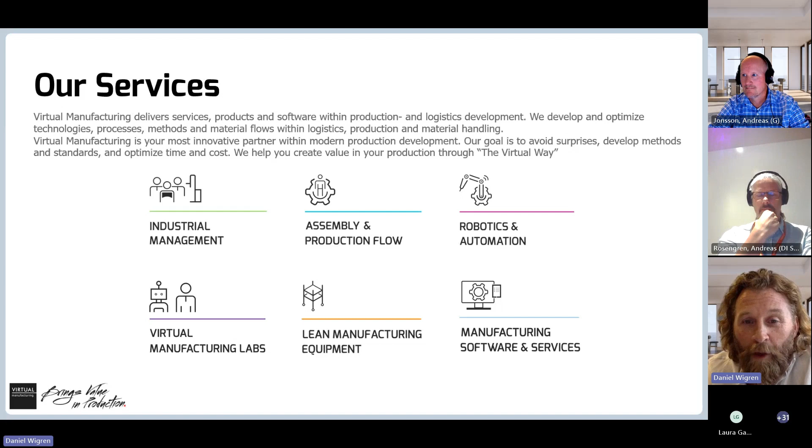I guess most of you joining us for the call today are within the manufacturing industry, and I just want to raise a challenge to all of us. This is sort of a slogan that we picked up somewhere down the years, and I thought it's pretty good, because at the end of the day, everyone involved in the manufacturing industry has a common challenge: trying to find out exactly what needs to be manufactured.

Ask us the question why we need to manufacture it, how we should manufacture it, and when it should be manufactured, in order to optimize performance and flow with minimal costs and resources. At the end of the day, that's what most of us are probably working with in one shape or form. We've had the possibility to do this for quite a few different companies around the world, some big and some small, but I think at the end of the day, it all comes back to facing that challenge.

Just to set the scene a bit for today's webinar: we're talking about digitalization, we're talking about collaboration, and we're talking about sharing the experiences we've been through. Before we start, let's just get some of the wording correct, so just look at some translations. What are we actually talking about when we're referring to digitalization, or even in some cases a digital transformation that companies or markets are going through?

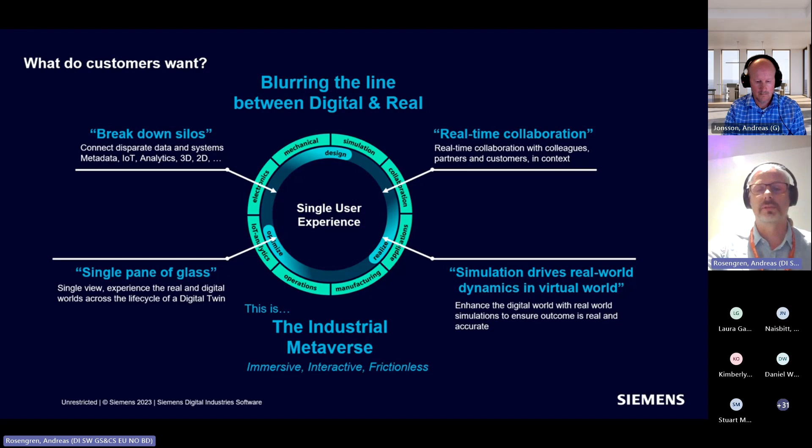So blurring the line between digital and real is one thing. Breaking down silos, being able to collaborate across these different systems and see things through one single pane of glass, if you like. Also being able to see simulation in a context more resembling real life. That's a little bit of background, and that's really what we would refer to as the industrial metaverse.

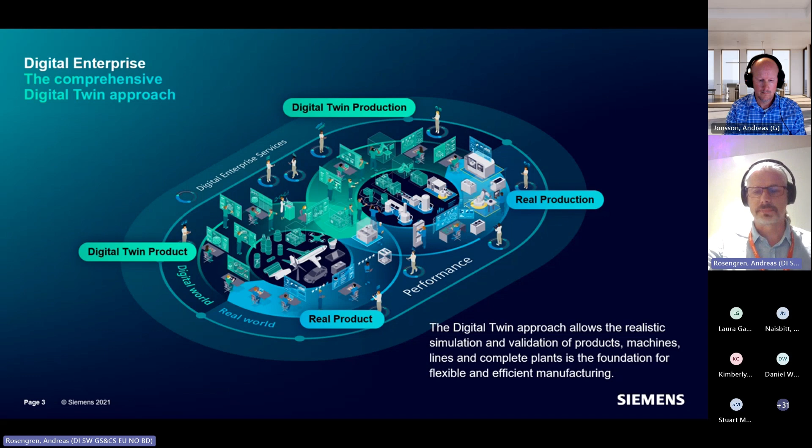Another background picture. I don't know how many of you have been subjected to a lot of Siemens presentations, but during the last couple of years at least we have been talking a lot about this comprehensive digital twin, which for us is really a way of framing all the different technologies we have, from both a digital twin of products, digital twin of production, and also the real product and real production, to make some kind of map or framework around this. I will return to why this is important.

Another thing that's important for us in making sense of our own portfolio is that this also works as a backdrop for our digital threads, which is also our way of packaging solutions. Because the portfolio is vast, and there are different ways of combining technologies.

It's made up of multiple representations. There's no such thing as one digital twin. Often you have one digital twin per use case, which means that without context, you can swim along in your different digital twins—you have multiple of those. Another important thing is it is an evolving object. If you want a living digital twin, it needs to evolve, and you need to manage this life cycle. Having this holistic approach also enables you to do some closed loop activities with bidirectional connectivity.

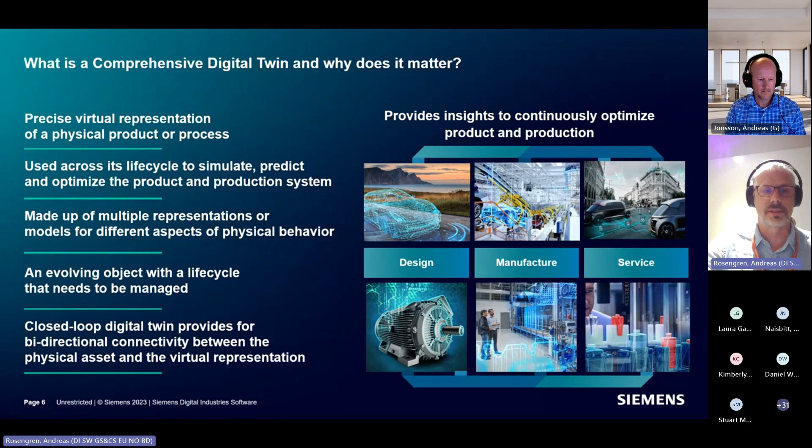So this leads us into the industrial metaverse. For us, Siemens' definition of industrial metaverse is really a place where fast engineering decisions are made, leveraging precise, robust data, real and digital. It also enables collaboration, to experience what it's actually like to interact with the comprehensive digital twin. So it's all about visualization, collaboration—you should be able to collaborate in this environment, and also interact and monitor and analyze your data.

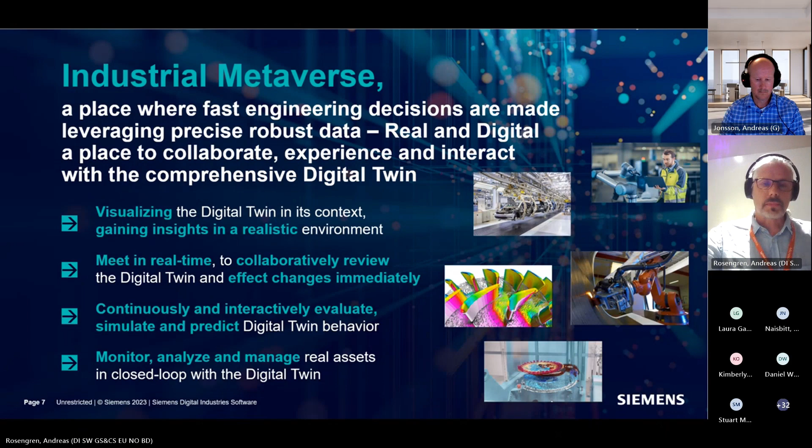I will be a little bit quicker here because the real bang comes in the movie, I guess. And this showcases a little bit of the background from that.

We are working in the Nordics with Freyr, which is a Norwegian startup for clean batteries. They are building a big gigafactory up in northern Norway in Mo i Rana, and they wanted to explore this metaverse because their primary goal was really to be able to sell the plant as a product, since they are looking for investors, trying to scale up production, finding new places to scale their factories. So they wanted to show that they have a little bit more than just ideas.

And they had already started, like many companies have, with platforms like Unity or any kind of basically game platforms. Unreal Engine is another popular one.

Based on our announcement about two years ago on our vast cooperation with NVIDIA, they were curious to see what this was all about. They had seen a showcase we did with BMW, making a really nice looking assembly line for cars. So we developed a joint project, seeing this as a good opportunity, because they're also a partnership-level customer with us, using a lot of our technologies. So we decided to develop a showcase together with them.

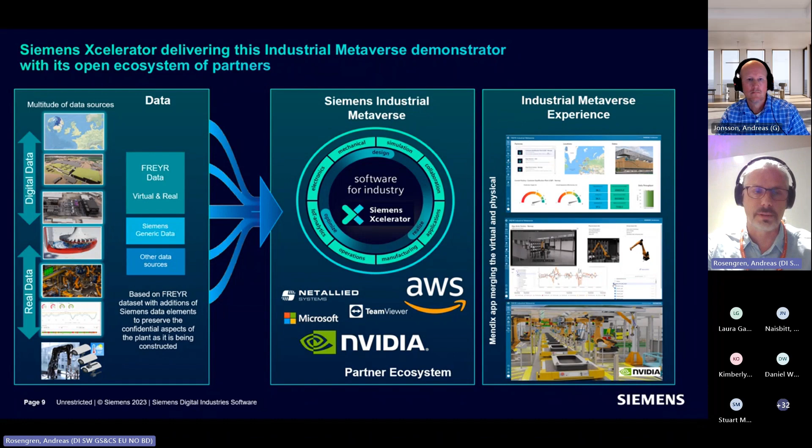So what do we see here? When you log into this application, you first see an enterprise overview. You can see some KPIs on different plants. In this case, we zoom into the Giga plant in Mo i Rana.

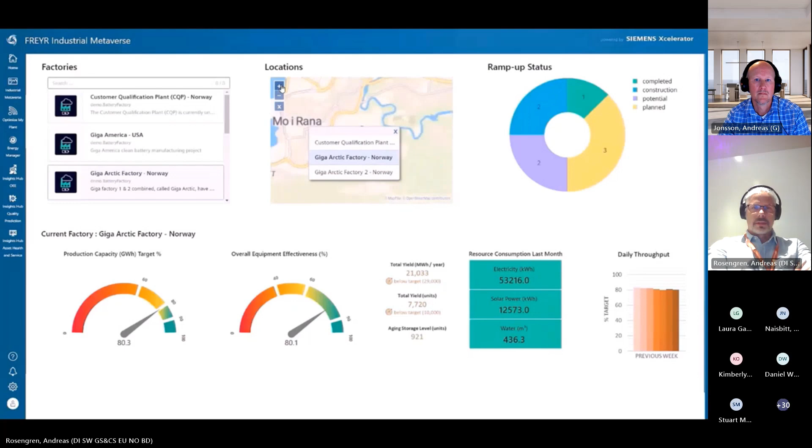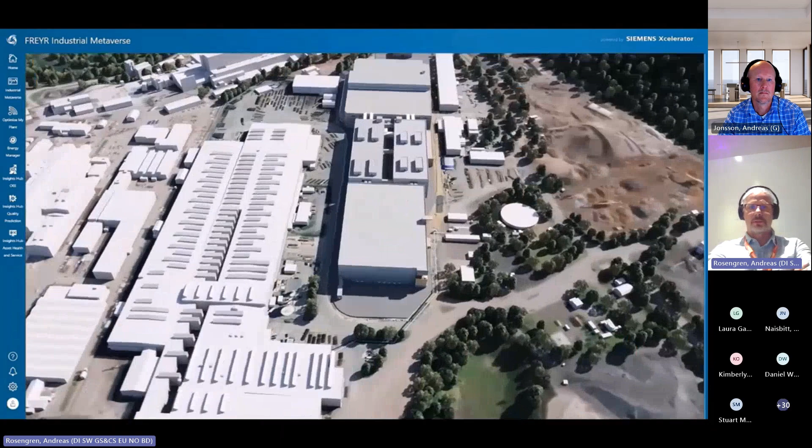We initiate the metaverse viewer and start off with a nice fly-in. Here you can see all the Google Earth data and the BIM model in all its glory. This first bit is actually the only thing that was pre-rendered—everything you see from when we pass the threshold into the goods reception is actually real-time rendered.

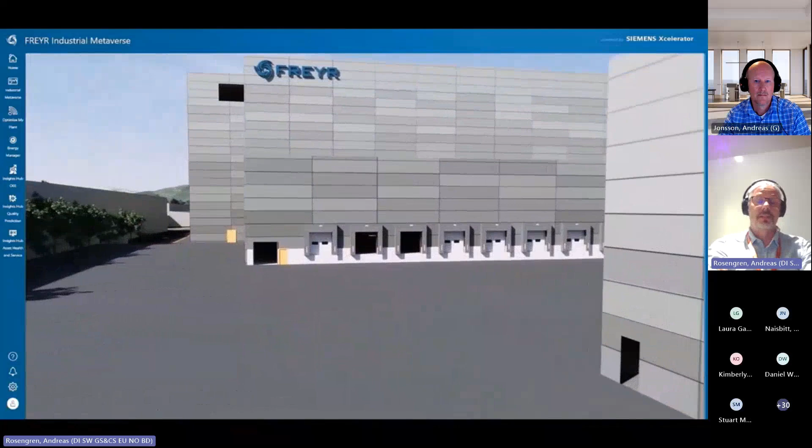So here we fly into the factory, come into this goods reception area, and we keep flying.

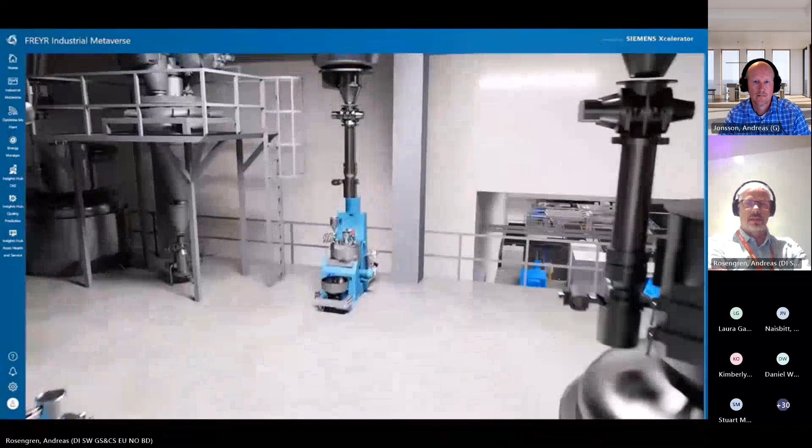At this first station, we have a mixer. It's an important step in the battery production, mixing the slurry.

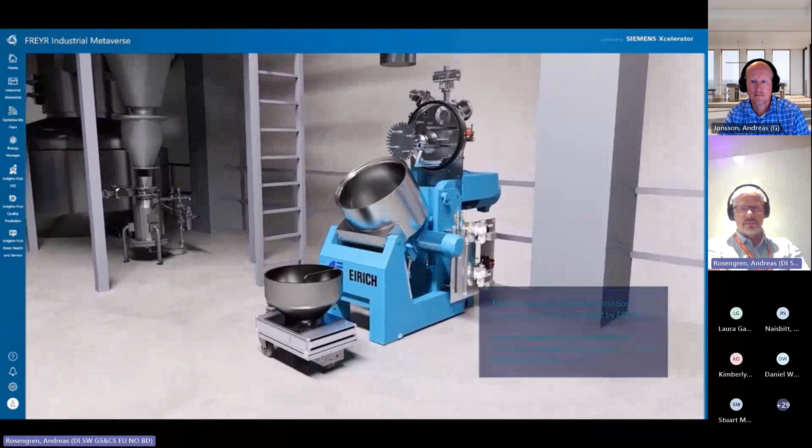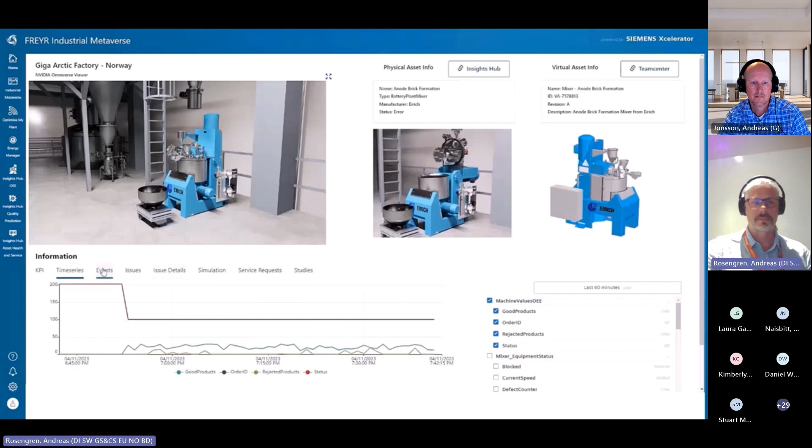In this metaverse user interface, which you'll soon see when we minimize the picture a bit, it's divided into different parts. You see the metaverse view, the physical asset, and the virtual asset. The virtual asset is basically the engineering side of things—you have tabs down here with all the information connected to this asset.

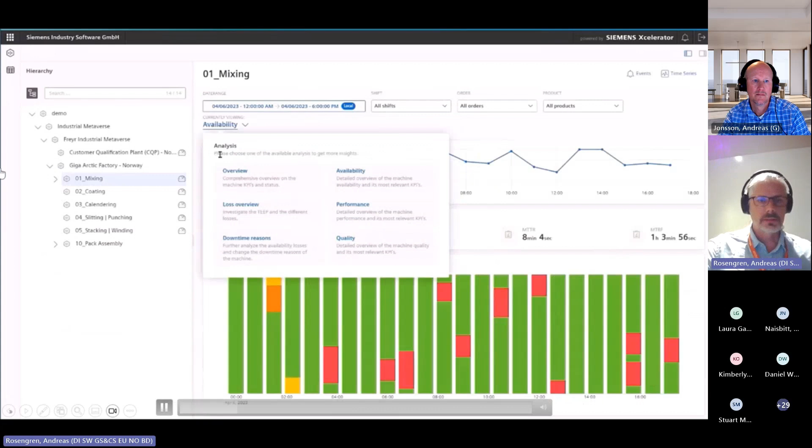Also, for this example, we will move into the— did it freeze? Oh, okay, sorry, my screen froze.

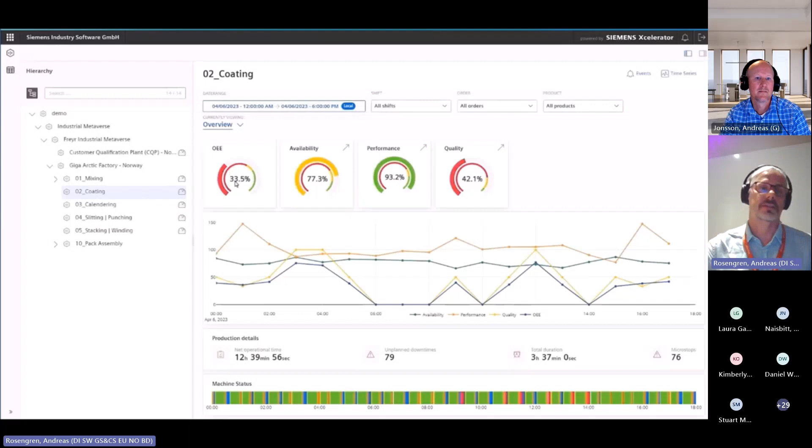We move into the OEE hub, which is another standard application on Insights Hub. We look at OEE and see that there's a quality issue. We go into another application called the quality prediction hub.

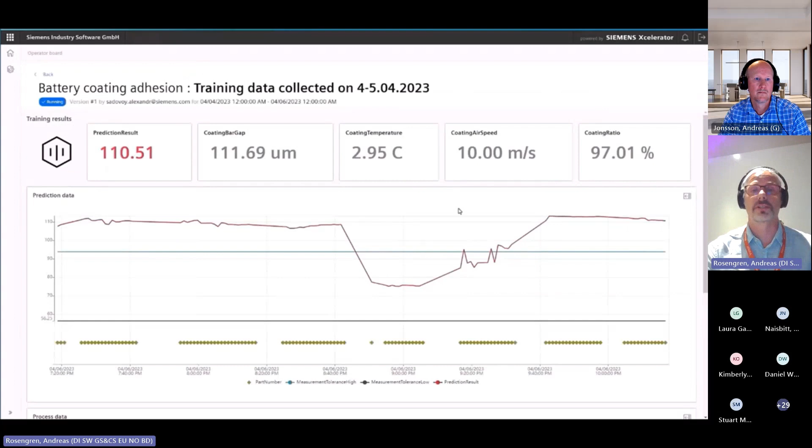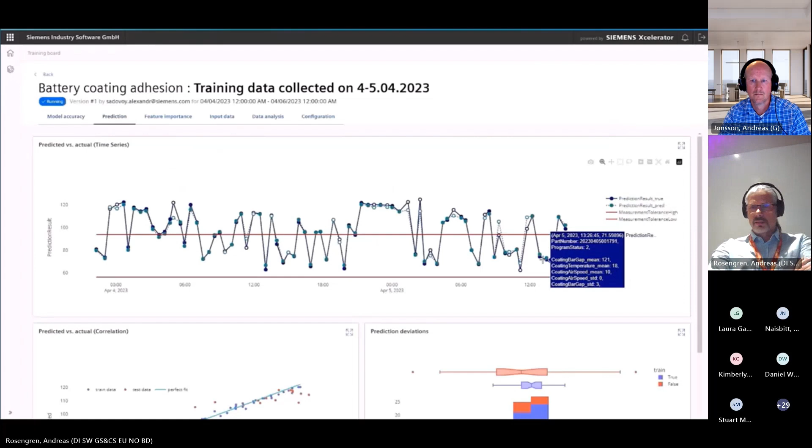Where we can, with the help of AI, make predictions on quality-related parameters. In this case, I don't really know—I'm not an expert in battery production—but apparently it looks like something with a coating bar gap.

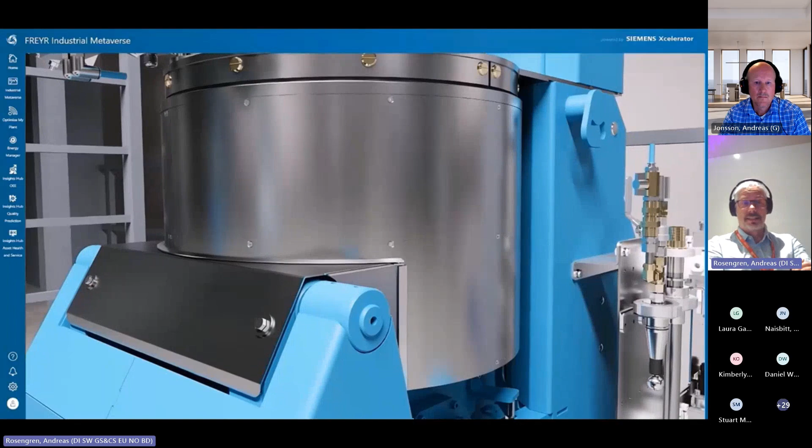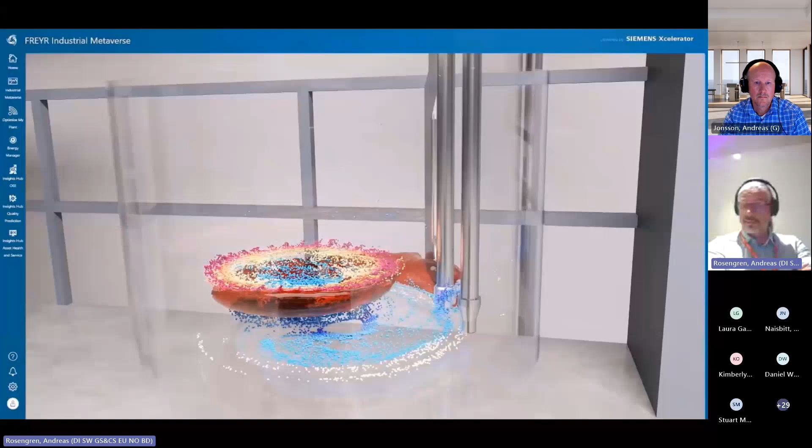Another important aspect of this super model is that we can use it to visualize different simulations. This example is a CFD simulation made in Simcenter. It's not real time, but we use the same context to visualize it.

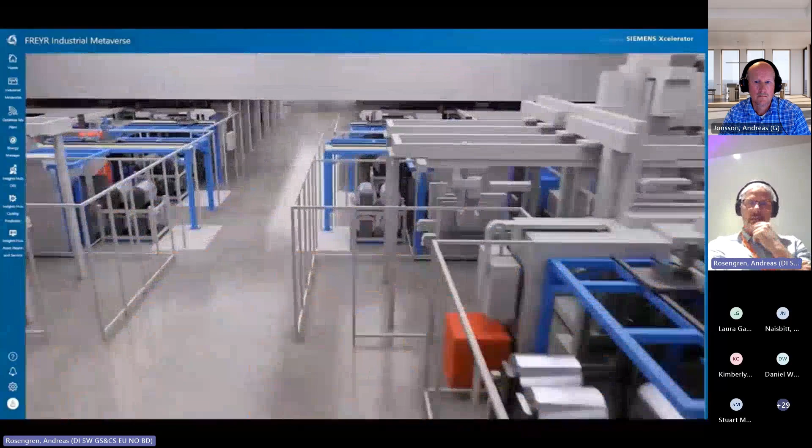From this, we keep flying—through this area over to some other robots. We'll focus in on another one.

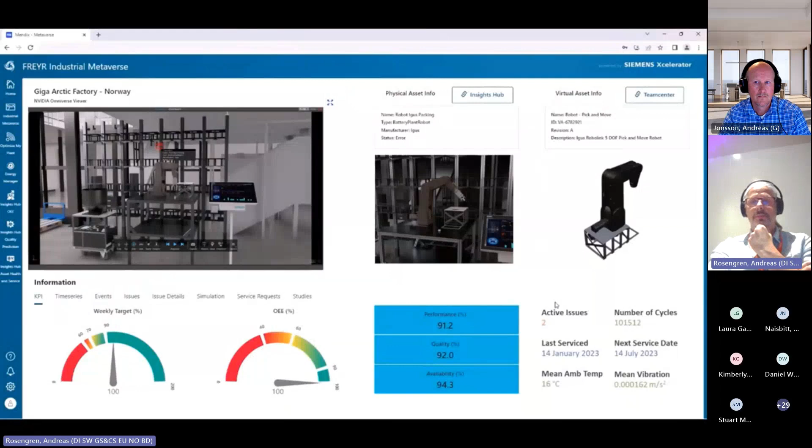Here we have also showcased something we call an executable digital twin, which is another technology we have. I'm not going to go into details, but in this case, from this asset we can take a look at IoT data, time series data for drivers. You can see how that has been behaving, and if there are any issues. You can connect these to any kind of system, like a maintenance system.

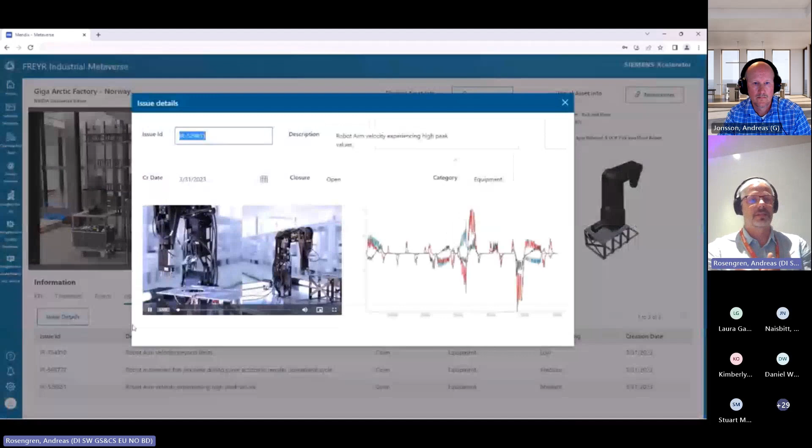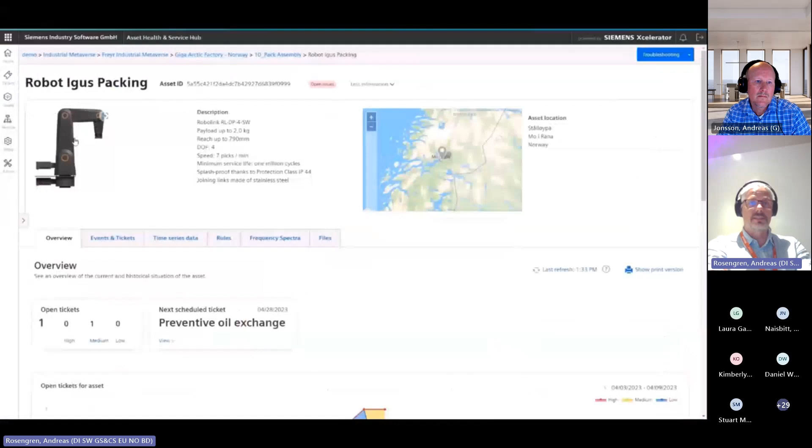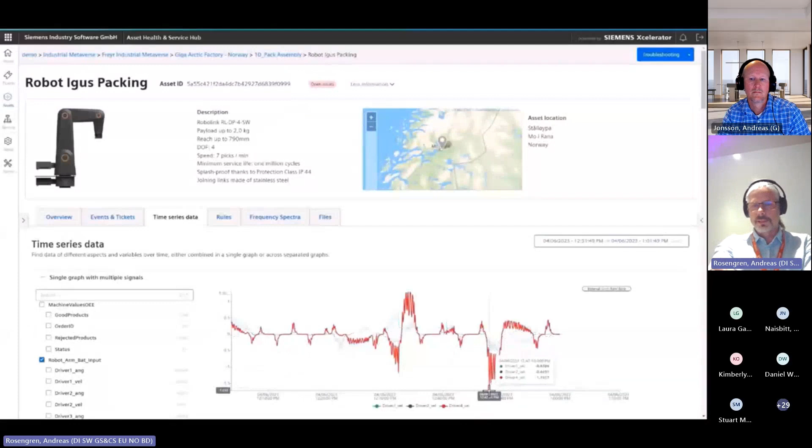But now we look at this streamed video, see how it's behaving at the moment. And we do see that there are actually some issues. We will go into another application soon, the asset health and service hub, where we can see how this one has been performing over time from a maintenance perspective. Are there any issues reported to it? And we conclude there is some anomaly that looks weird, so there's probably something wrong.

So let's gather our brightest minds to elaborate a bit. So we initiate a Teams meeting directly from the metaverse, and here we use the metaverse to have a discussion.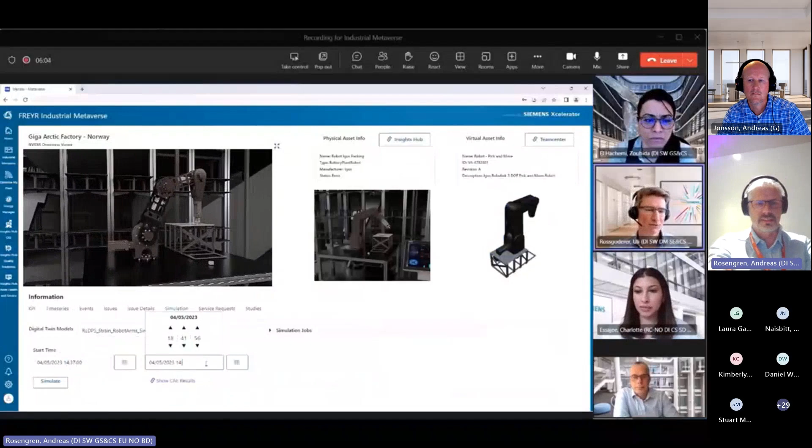We look at these time series data, and there are some simulation models connected to this. So we first look at last week's data and see if there were any problems then, and we do that simulation, showing it overlaid on top of the metaverse. You can see that last week looked fine. But something has happened, so we then take the latest data set and do the same.

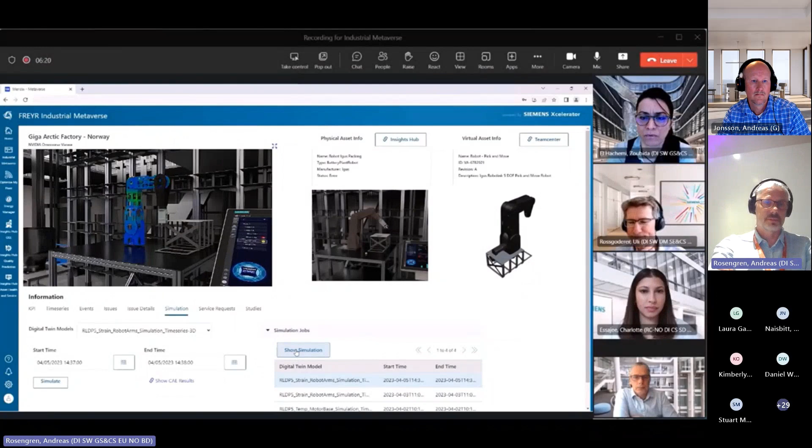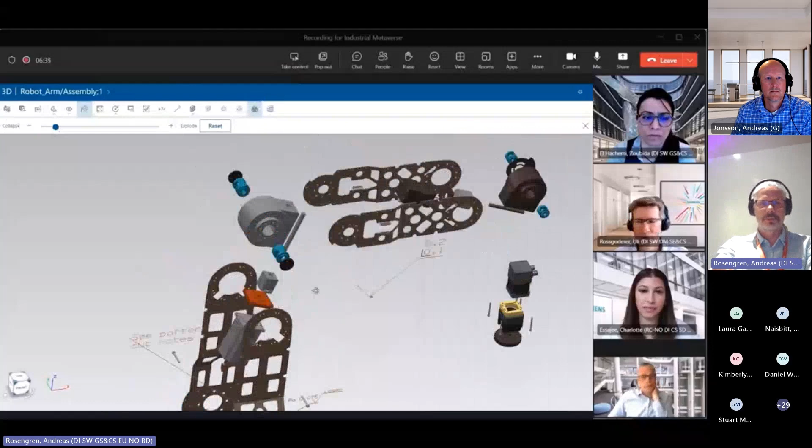And here we can see that there is some shuddering or shaking going on in the second axis. So we go directly into Teamcenter and start drilling down inside these assets to see what it could be. We have a look inside, and as in most cases, we conclude that there is a faulty bearing.

So this is actually a standard functionality in Teamcenter that we accessed from the metaverse. So we go back into this asset health and create a ticket, telling our maintenance guy to come change the bearing. And of course, he will do that.

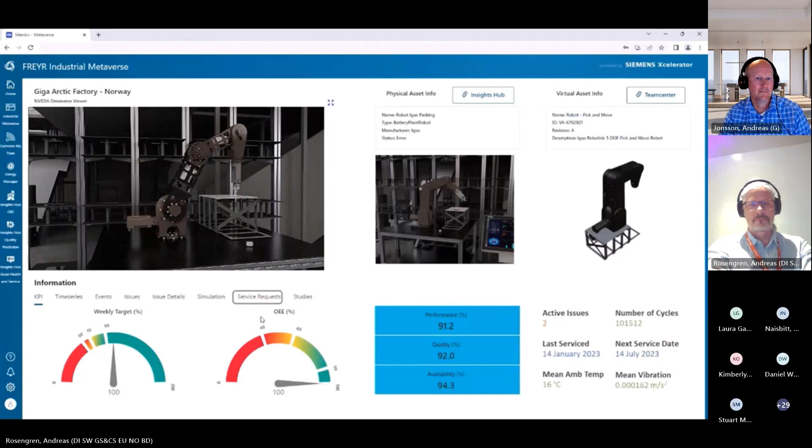Here we see our maintenance guy getting pinged on his team viewer screen. Urgent ticket, the robot picker. He will get some work instructions, and the selected screens that we have prepped for him. And of course, he will go and do the work.

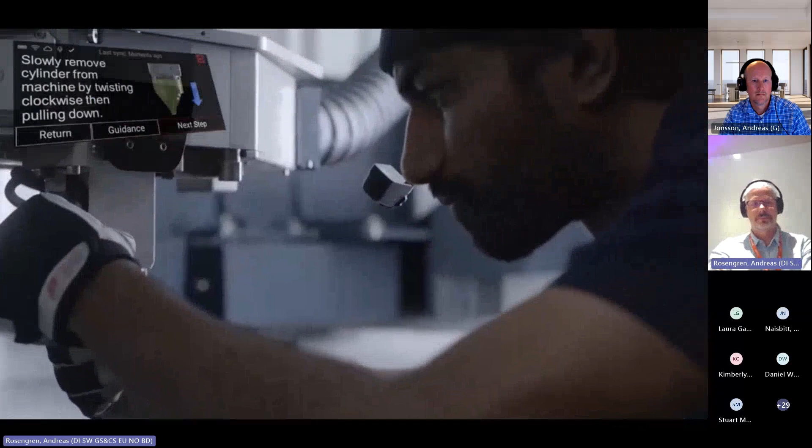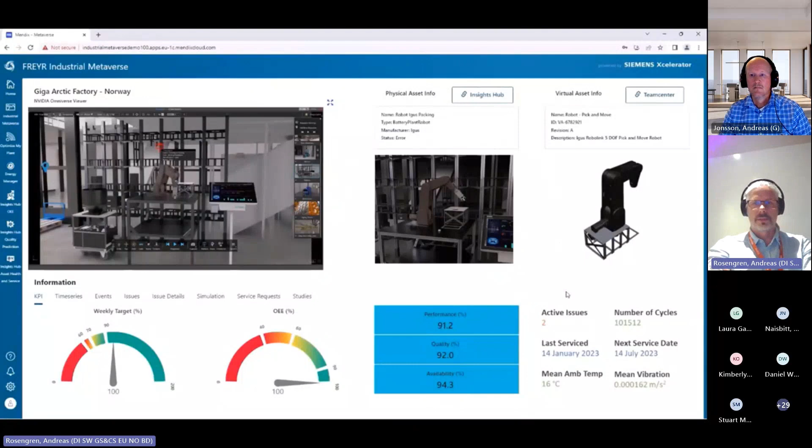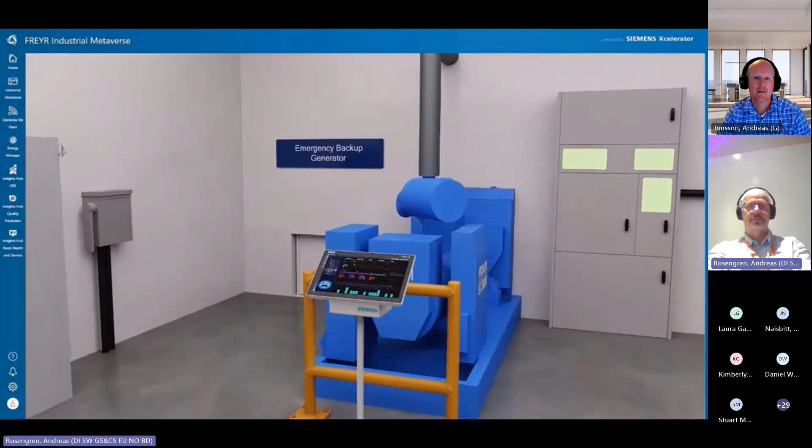From this point on, we can move on to keep flying. We come through the formation and aging. First, we stop by this generator. And from this one, we look at another standard application called the Energy Manager, which allows you to analyze the energy flows within your factory. You can see where you get your electricity, water, and gas, where it comes from, and where it's being consumed.

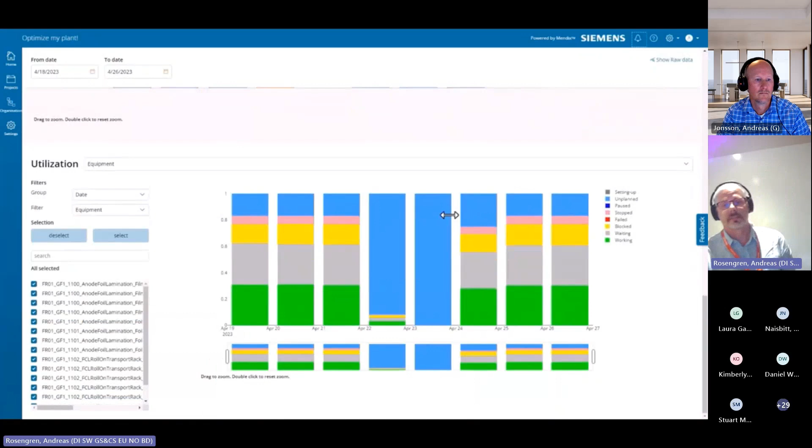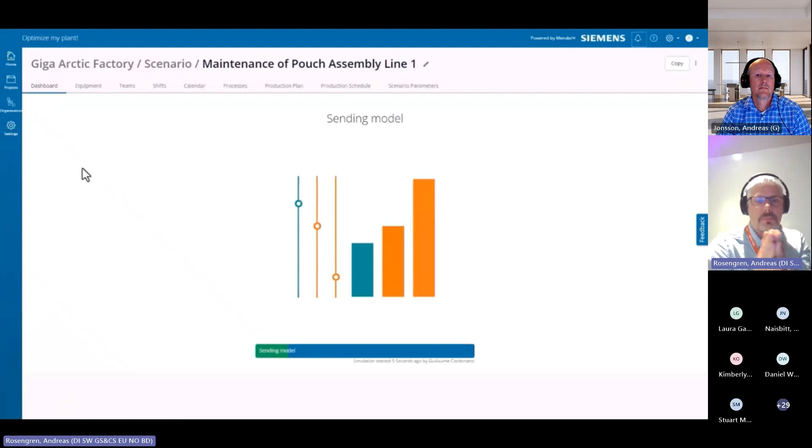Here we make a little excursion into another application called Optimize My Plant, which is really a plant simulation model and discrete event simulation addressed as a runtime, and you can feed that with data from different sources. This is actually part of a different use case where we have seen an anomaly, and this production manager will try to find some mitigating actions to recover a bit of the lost production.

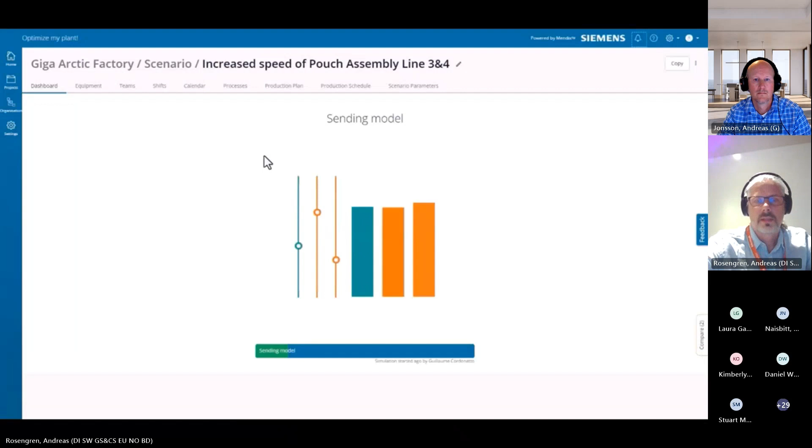So he uses this model to test a few scenarios. He tries to add another shift. He can also speed up, just increase the speed, and then test these different scenarios, and then of course choose one. Okay, let's go with just adding another shift or something.

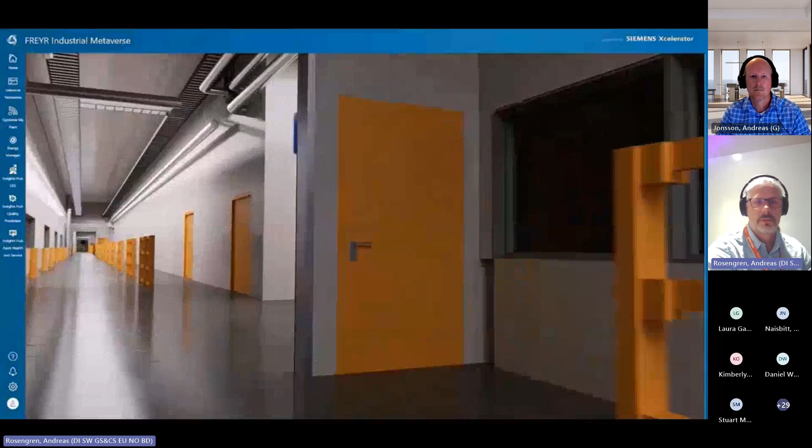From this point on, we move on through the formation aging. A bit of it is basically high bay storage where you store batteries and where you charge and discharge them for conditioning and measuring.

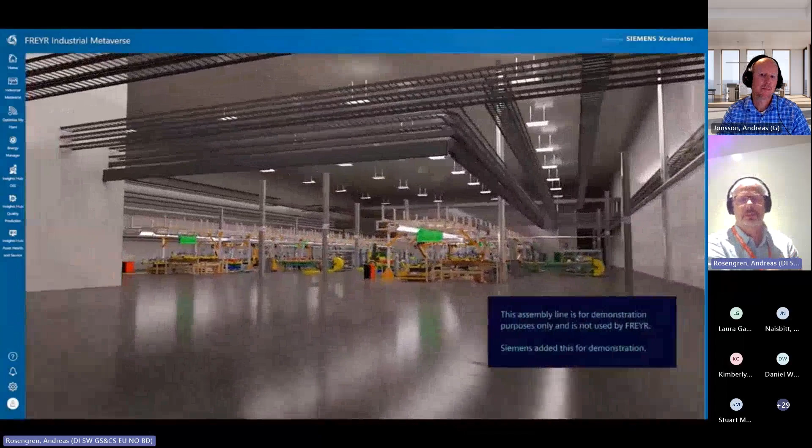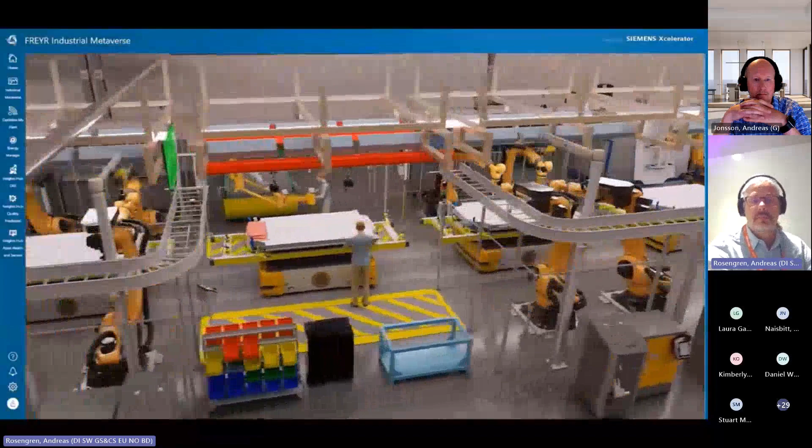And that actually brings us to the last bit. This consists of two quite large assembly lines for cell pack assembly, and these are two complete process simulation models where we simulate both robots, PLCs, AGVs, as well as manual labor, where we use these two mannequins, our ergonomic study mannequins, Jack and Jill.

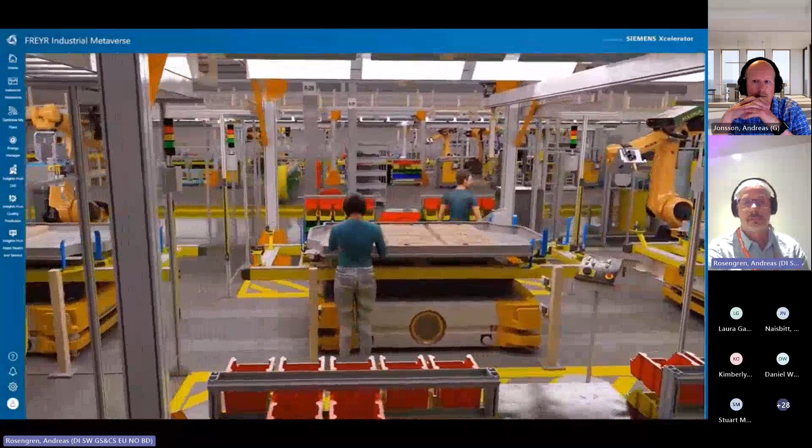The main point here is to show that we can treat the manual station just as we would any kind of automated asset, because the station itself has a lot of aspects or data connected to it. So you can look at KPIs and so on the same way that you would for any robot or whatever.

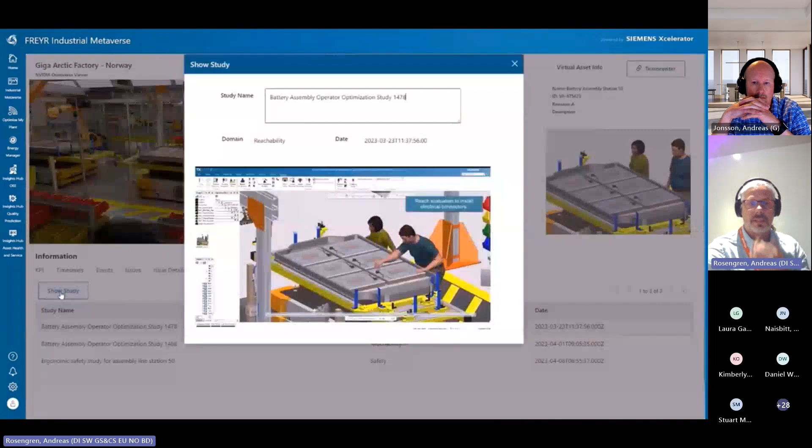So when we go into the metaverse bit, you see the KPIs and so on. You see issues, but we can also see that there are some studies connected to this one. In this case, we can have a look at the ergonomic studies that has been done in Process Simulate, and do a bit of an analysis of what's going on and what could be improved.

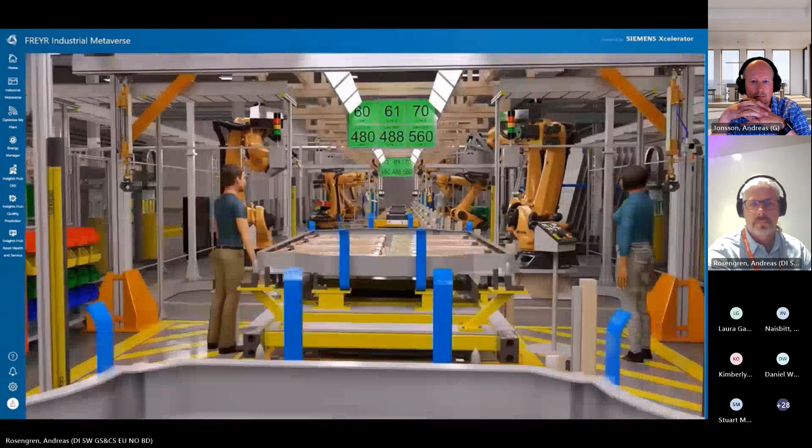And with that, we're getting sucked out of the building. And that kind of concludes the virtual tour of this metaverse case.

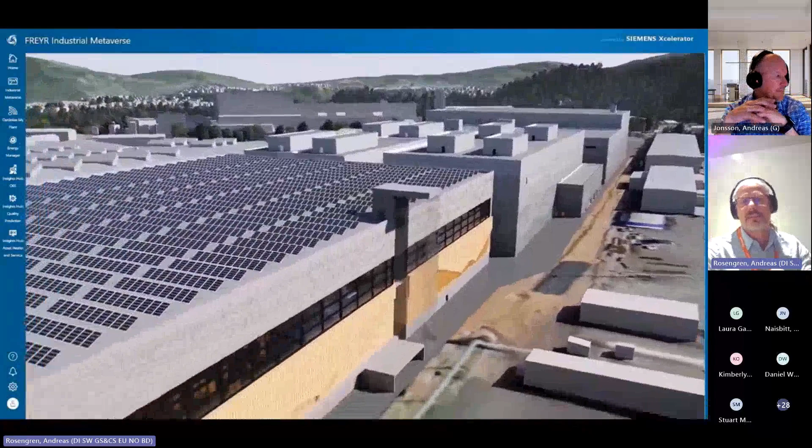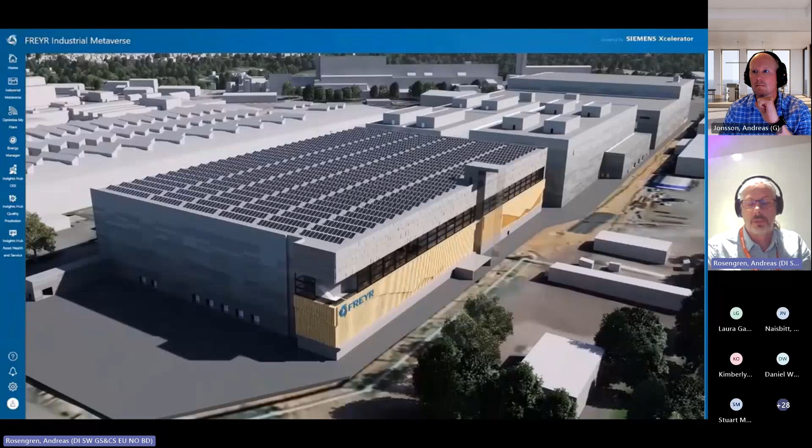I know this showcase, it's a little bit of everything at once, so it's not really easy to show you the exact different use cases. But after this, we have already implemented this in our own factory in Erlangen, where we have a very nice visitor center also, where you can see how we work with this continuously in our own plant. And with that was basically it from my side. I don't know if there's questions. Maybe we should push the questions to the Q&A part later.

So, Andreas Jonsson from Volvo Cars. I will present a little bit how we are working with the virtual plant, a little bit about the history around it, and how we, especially now in recent years, are starting to collaborate with our suppliers. And then also touch a little bit on what Andreas from Siemens just presented when we talk about what our next steps are.

Just very short about me: working as a solution lead for PLM at Manufacturing Digital at Volvo. I've been within the area of virtual manufacturing now for a little bit more than 20 years.

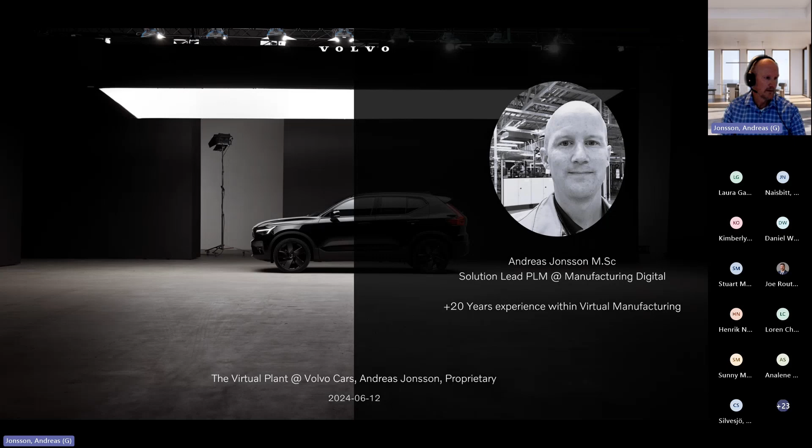As I said, first a little bit about the history. We'll talk a little bit about our engineering tools, a little bit about our world-class engineering initiative, and then we finish off a little bit with our next steps.

If we talk about the virtual manufacturing history at Volvo Cars, we are actually celebrating 40 years this year. So we started already back in 1984 with what then was named CATIA Robotics. We switched over to RobCAD in 1990, which later on became Process Simulate.

Started OLP in Paint Shop in '93, included full offline programming for Body in White in '97. In 2006, we moved over to Teamcenter as our platform basically for our engineering data. Started also then with a Siemens application called eM-Server, which is a database for Process Simulate.

2009, started with robotic path planning with algorithms. Also did a lot more of event-based simulations controlled by signals instead of just having a time-based simulation.

Let's see if we can get the next one. Then we developed our own modular-based tooling for Body in White, so we can get our fixture concepts up much quicker.

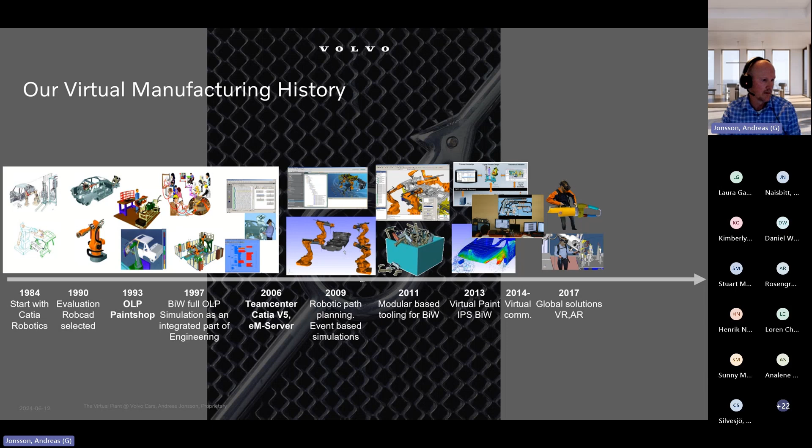to connect our PLC into our simulation models to be able to verify the complete sequences. 2017, we introduced global solutions for VR and AR to be able to collaborate in our global context. And then now, 2019, we started our world-class engineering concept, which I will explain a little bit about what it is and why we did it.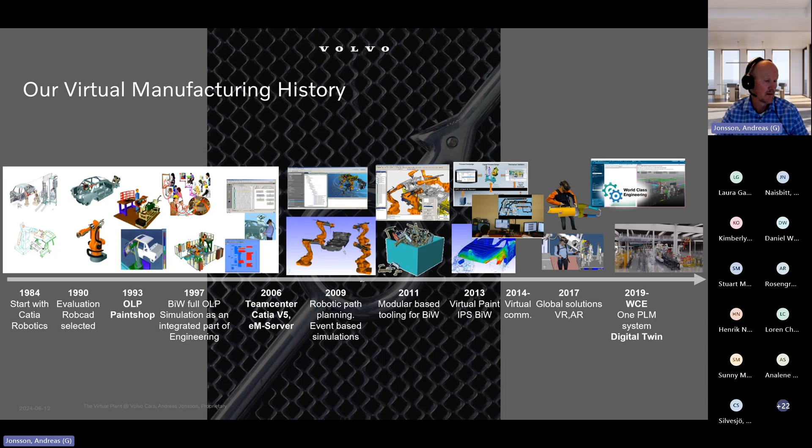And we are also starting now to look into the digital twin, which is a buzzword that everyone is talking about, but we have started to look into that one as well. So really interesting to see what Siemens is doing there as well.

If we look at it a little bit, what and why we have been doing things: in the beginning, it was a lot about just the technical solutions and the simulation performance, then data access and collaboration, lead time reduction, and now in the end, it's about being able to collaborate globally around our data.

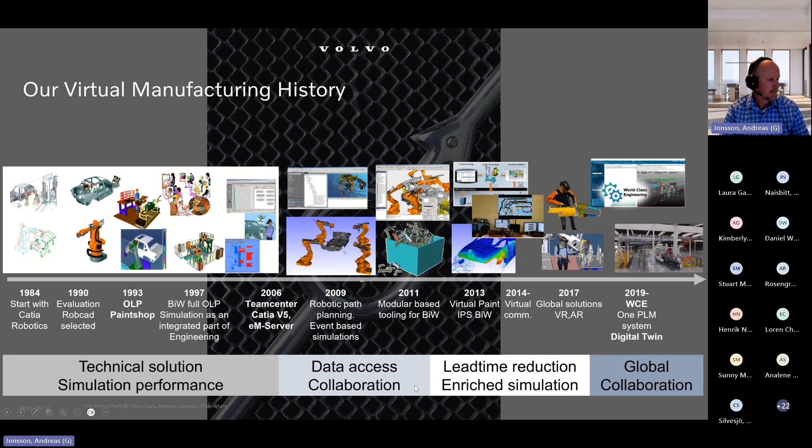Our engineering tools that we are using: the main tool in our simulation processes is Process Simulate from Siemens, which is also an important part of our virtual commissioning setup, where we do ergonomic simulations for humans, as well as our robotic simulations and offline programming.

We also have our IPS software, owned by Fraunhofer Chalmers Research Center, where we can do optimized and collision-free robot paths with advanced algorithms over a complete line. We can also do paint simulation, as you saw in the previous slide.

For tooling design, we have CATIA from Dassault. For capacity planning, we use PlantSim from Siemens. And then we have Siemens Teamcenter as our PLM system. So these are our main engineering tools.

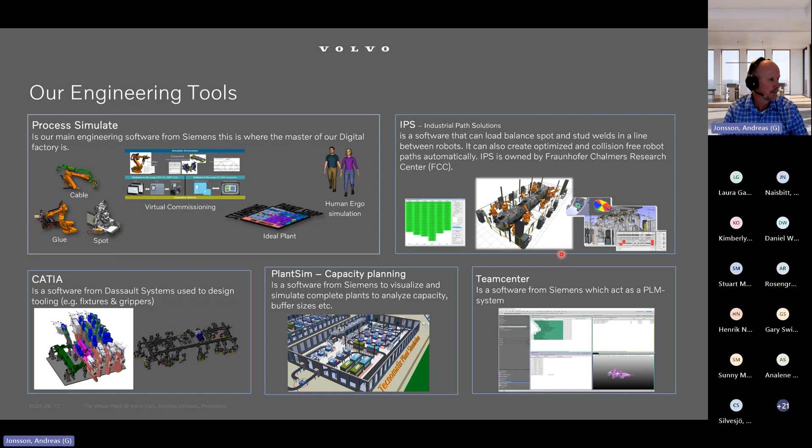So, world-class engineering - humble words from humble Swedes. We started world-class engineering because we want to reach what we at least see as our ideal state, which is an updated virtual plant over time that can support different scenarios, and most importantly, seamless integration to our suppliers, so that everyone can work in the same IT platform to support our manufacturing setup.

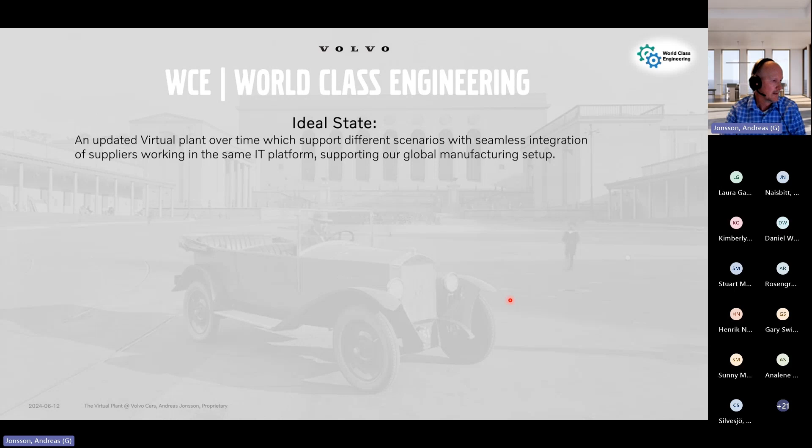So this is what we used to have in our legacy setup. As you can see, there are a lot of arrows, and many of them are only pointing in one direction, which means our data stream was extremely disrupted, and we had really poor data exchange with our suppliers.

We had EM server as our database for our virtual plant data, which included Process Simulate and Process Designer. We could have a one-way feed of engineering data to our car parts from R&D, from Teamcenter, but then we needed to continuously repeat that loop at every design freeze. We used AutoCAD for 2D layouts. Plant simulation could receive some data from EMS and IPS as well, but mainly only exports out from EM server.

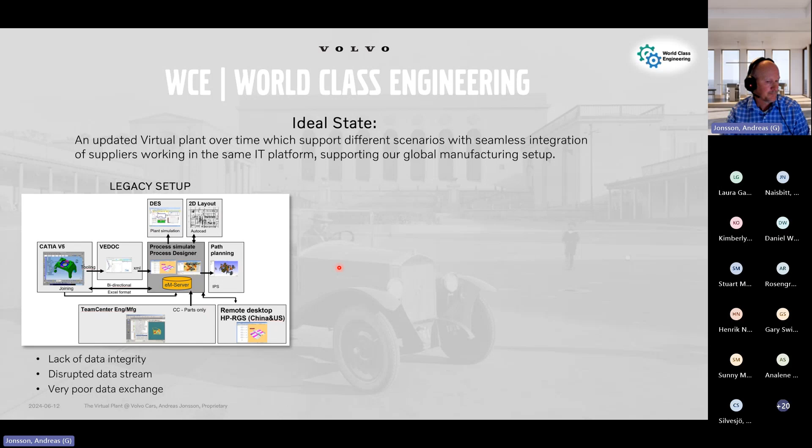So what we instead decided to do was use Teamcenter as our backbone, and have our engineering applications running on top of Teamcenter. That is the goal, since R&D also has design data in Teamcenter. We could have much faster interaction between R&D and manufacturing, and get updates from R&D seamlessly and include that in our process planning.

Even the designers at R&D can load their scope of the car in the plant context as well. So in Teamcenter we have our manufacturing BOM, including joining. We have CATIA connected to Teamcenter for tooling design, and our NX Line Designer application for layout design, replacing AutoCAD - no more 2D.

Instead we use several representations of the same object, where you have one object, but you can load it in 2D if you want a 2D view, and in 3D if you need to work with that. We have our manufacturing process planning application, or workbench, within Teamcenter to facilitate our process planning, and then we have Process Simulate running on top of Teamcenter in this setup.

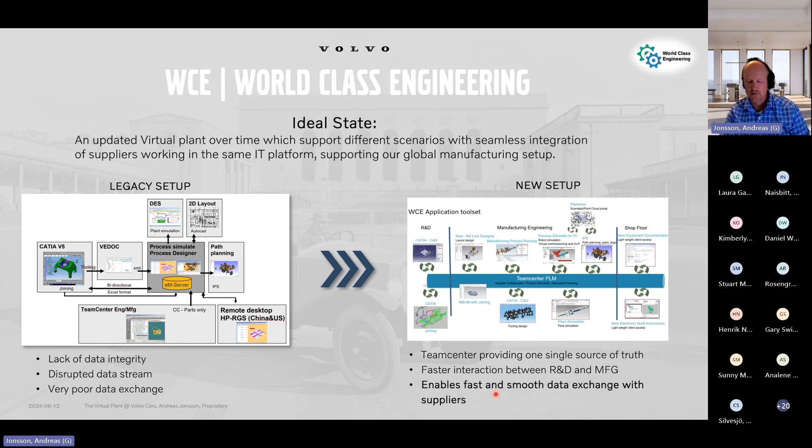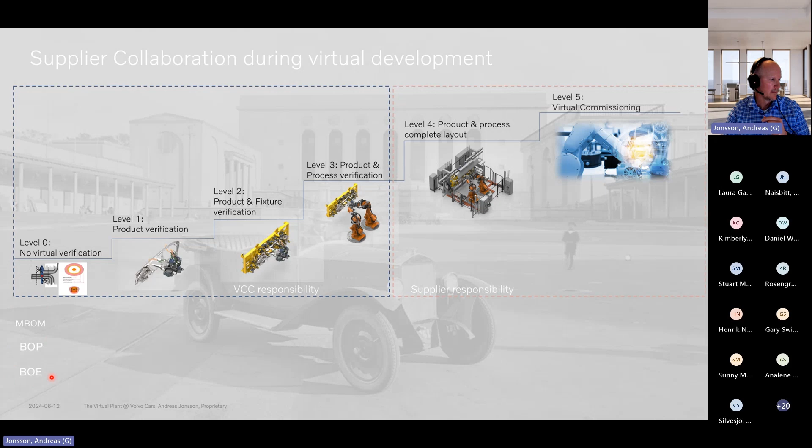That supplier continues with the detailed development, all the way down to installation and commissioning. When we look at the key data we have now in our Teamcenter environment, we have our manufacturing BOM, our bill of process, and our bill of equipment.

Volvo is responsible for the manufacturing BOM, including our features, which can be joining or clamping data, for example, across the complete project. For the bill of process and bill of equipment, we are responsible for those structures within Teamcenter until we hand over, and then we can seamlessly hand over responsibility of that data to the supplier immediately in Teamcenter. Later on, we take back that responsibility once the project is delivered and approved.

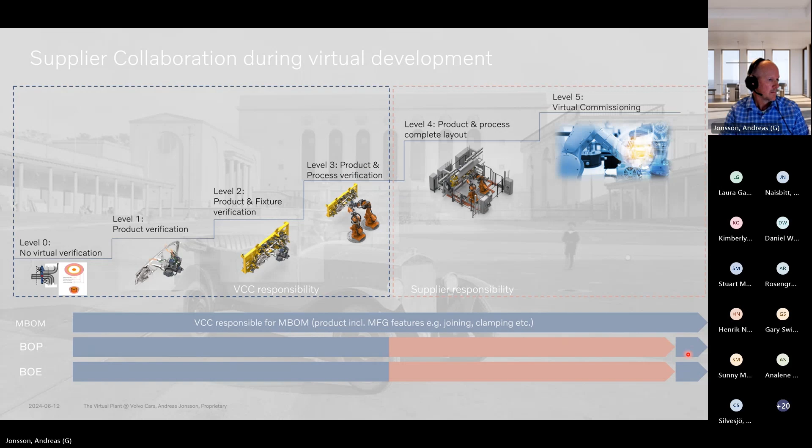So basically, with Teamcenter, all our data is managed within our Teamcenter environment as Volvo. The environment is hosted today in Azure Cloud with servers in Amsterdam, and we have distributed local cache servers around the globe to help with performance when we load mainly heavy CAD data.

So we have our MBOM, bill of process, bill of equipment, and process simulate studies all hosted within our Teamcenter environment. And we have our suppliers connecting to our environment using VPN, so they work directly with our data. We don't have to do any import or export, which previously took massive amounts of time.

The suppliers will only see data relevant for the scope they are delivering. On the supplier side, we have Teamcenter clients where they manage the data they are supposed to manage, and they have installed engineering applications directly connected to our Teamcenter environment. We are now running the first projects with suppliers both in Europe and in Asia.

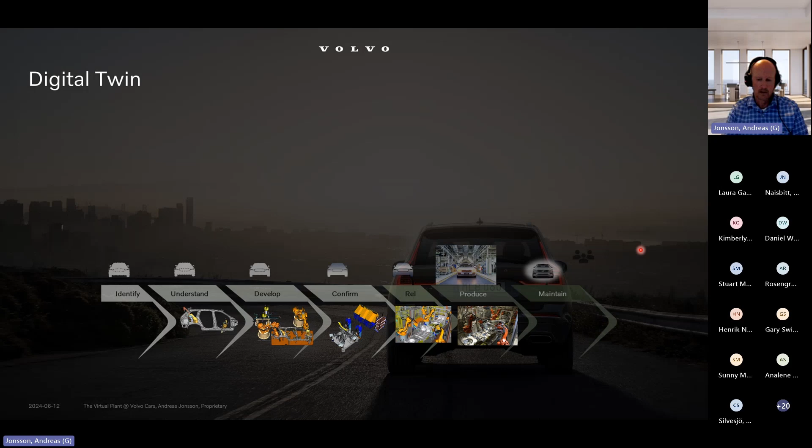If we look a little bit to our next steps and the digital twin -- this is just how we see it, you can agree or disagree. If we look at our development process for the car, we can also see the same development process for our plant, basically. We have a virtual development phase where we need speed and flexibility.

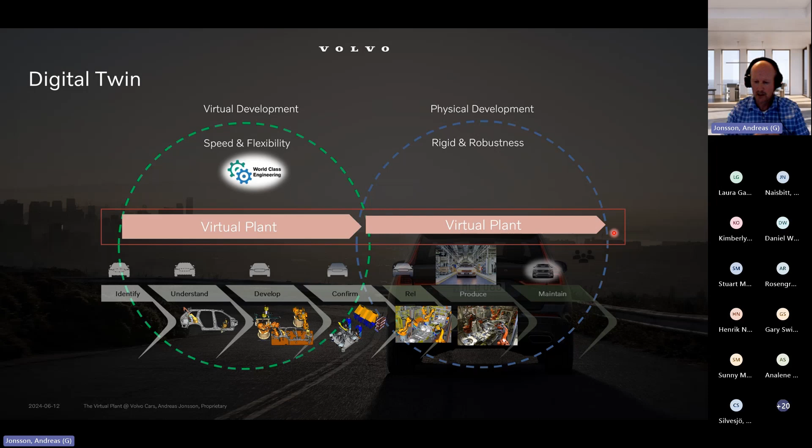Our virtual plant we build up during our virtual development, but that one continues to live on and is constantly evolving as well, as we make changes during production. Once we have started up production, we also get massive amounts, as Andreas explained, of IoT data from our production and from our machines.

And that's when we can create our digital twin plant, which we then can feed with data, both from reality and from our virtual plant. And this then is what will become this metaverse, as Andreas has explained. So this is our take on it, and that is basically what we are looking into now for our next steps for our virtual development, and then later on connecting it to our physical plant.

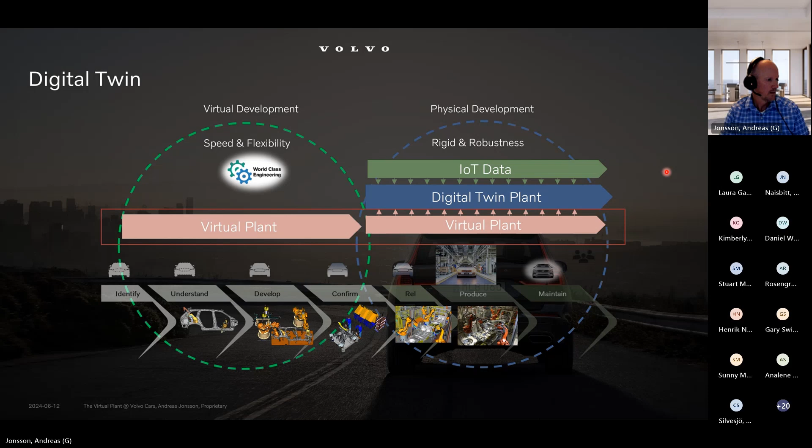Another fascinating insight as well. Daniel, do you want to do any kind of wrap up on maybe that? Just to wrap it up a bit.

I think what we've seen today has been some great examples, both when we're talking about Freyr, which is a gigafactory, sort of a startup company, and their business model is based on the fact that we're going into the electrification world that more or less all of us are being affected by, not least the automotive business.

Coming back to Andreas, I think the key takeaway is that the whole concept around the virtual plant is something that's been in development for, what do you say now, almost 40 years. And I like the statement world-class engineering -- you got to aim high to get high, or to come far.

And I know there's been a lot of work around it, and I think the key message is to start somewhere, find your pains and do something about the pains that you're having, irrelevant if you're a small manufacturing industry or a larger global manufacturing industry. Yeah, for sure.